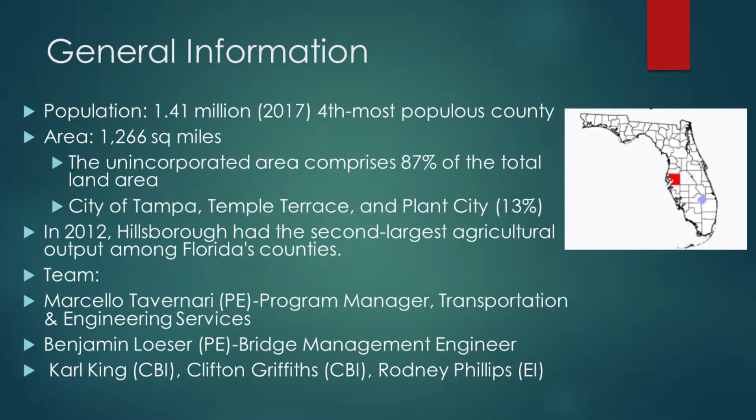All right, so just wanted to kind of share what we're doing in Hillsborough County, how it's all eerily similar to the states and everything that the states are doing. So just a little bit of information. Hillsborough County area has 1.4 million people, a little over 1,200 square miles. The unincorporated area, which is Hillsborough County, is about 87% of that. So a lot of rural areas. The city of Tampa is the primary city, makes up more than half that population. Just interesting fact, a lot of agricultural. We see that in our rural areas, that's actually a lot of the impacts on our bridges.

So some of our team: Marcello, he's our program manager. He oversees all of our asset management for pavement, bridges, sidewalks, intersections. And then there's myself, I'm the bridge management engineer. And then I have two CBIs working for me, as well as an EI. So that's very uncommon to even have inspectors or have engineers working for you. The county's staff and management knows that this is very important.

Just a little bit about our inventory. We've got 249 bridges. That's the most out of any local agency in the state of Florida. We've got about 25 non-qualifiers with our pedestrians, trails, et cetera. I don't know about you guys, but right now in Hillsborough County, growth. We have a large number of neighborhoods, developments going on in the southern part of our county. A lot of development projects. We're working with developers and engineers who've never done bridges, who are designing bridges that are going to become part of our inventory. So working with them has been very much of a challenge.

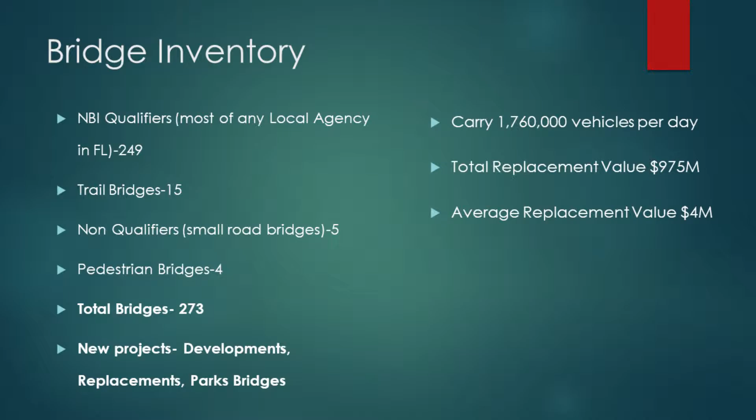And just a little bit of our almost $1 billion worth of value of our bridges. Some of our bridges, a lot of channel beams that were built out in the 60s, box culverts, our AASHTOs. We have one bascule, a lot of flat slab, and one swing type. So you can see the bridge material types, concrete, pretty much 95%. A little bit of metal and a few timbers here and there. Beams, a little half of our inventory is beams, slabs and culverts are about a quarter each.

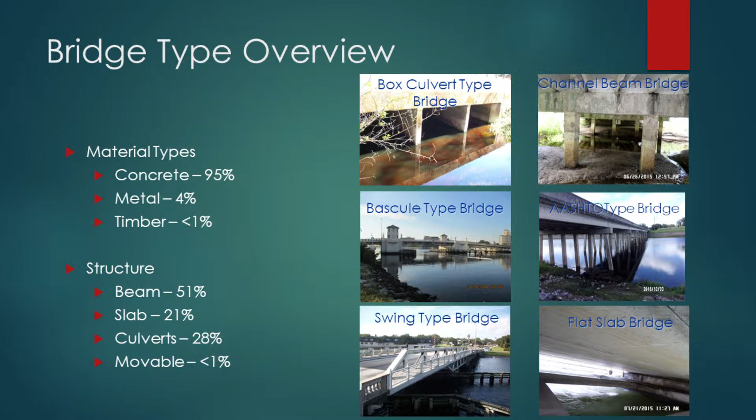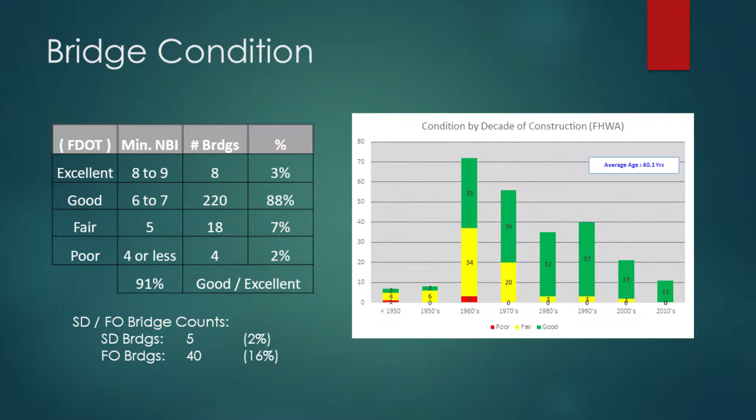So some about our bridge condition, we're actually doing pretty well, considering about 91% of that is 6s and 7s and up. So this actually mirrors kind of the Florida DOT, the bridges that I was managing at the time for District 1 and 7. These numbers look eerily similar, with a few structurally deficient here and there. And so overall, we're actually in pretty good shape. And as you can see, based on the condition, I feel like this looks almost identical to everybody's inventory with the 60s and 70s. So obviously, a little over a third of our inventory is already past their design life, with an average age of 40 years for us.

So funding's always the biggest thing, right? So a few years ago, our Board of County Commissioners approved $800 million over a 10-year period for public works, public utilities. And so we got about $4.4 million of that towards the bridge and guardrail program. 9 or 10 projects, you see there about $12 million, we were able to get funded for replacement. So those structurally deficient bridges, some of those issues, we are getting replaced.

And then just this past November, the tax referendum, the Hillsborough County voters approved a penny sales tax for transportation, as well as a half-penny sales tax that went towards the school district. So very, very important, very big. They're estimating upwards of $275 million per year in transportation funding. Hillsborough County is going to get maybe $150 million of that. It's still unknown at this point how much is going to go to the bridges. They want to know, how much money do you need? Well, I don't know.

So what do we need, right? A bridge management system. Even with 250 bridges, I'm still being asked the same questions. You know, Mike mentioned this morning, what's your 10-year plan? I was asked last week, what's your top 50 bridges you want to replace? I don't know. So let me put some numbers together, run some reports.

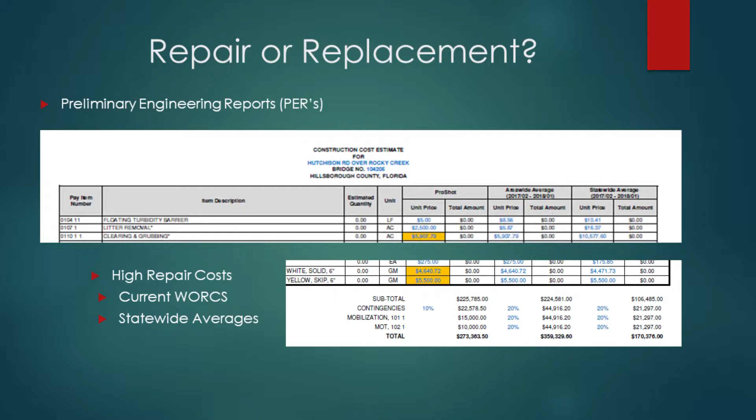We're doing that by hand, right? We're looking at it, we're reviewing it, we're making decisions in a room, and from there we're determining what do we want to do with this bridge. Minor repairs, major repairs, replacement, right? Kind of that first step is putting together with my countywide construction just minor repairs, joint repairs, small repairs, things that are just real easy that I know they can do. I put a list together and create that work plan for them for the upcoming fiscal year.

From there, all the more major reviews, major repairs that need some engineering evaluation, we put those together. And that's where those PERs come in. We're going to send the consultants out, do an inspection, come back, create a report for us, something that's binding. We have them bind it. We can give this to management if they ask, hey, why are you replacing this bridge? Here's a full report, the major repairs, the minor repairs, here's the replacement cost.

So we find that very valuable. At first I was kind of hesitant because I'm like, it's just a minor repair. But then you think about it, when management wants to know things, they want to know things, right? So if we can produce something very quickly, then it really benefits us. So from there, they're going to provide those reports back to us, and then we're going to make some decisions.

Are we going to give it to this WORCS contract, we call it a WORCS contract, work order, to the contractor, or are we going to put this out to bid? The costs are just way too high. Then we look at our replacements. Do we just want to replace it? And so we kind of try to develop those different categories of our bridges and then try to create that work plan based off of that. And then ultimately it comes back around post-construction, post-inspection, follow up the next year when the inspections come back in, make sure all the repairs were made, et cetera.

Repair or replacement. Here's an example of one of our PERs. ProShot is the name of the contractor. And so these are all their unit prices that are already pre-established, obviously. So when we look at the needs for that bridge and those unit prices, upwards of $275,000 if I were to give them this project. All right, well, if I put this out to bid, it's $200,000. I mean, are you going to put a $200,000 project out to bid? Most likely not. That's just not a lot of money there.

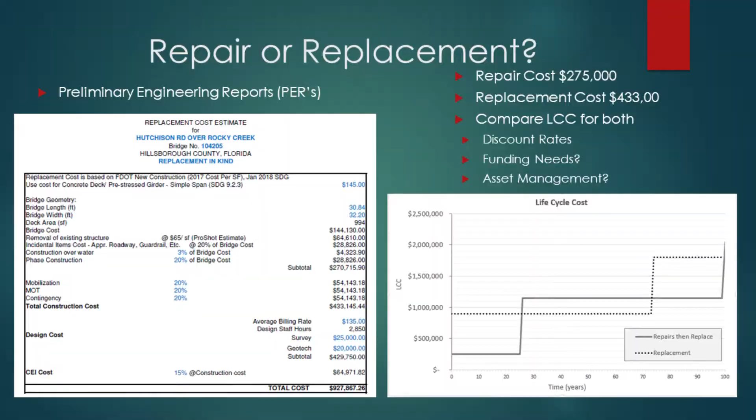Trying to figure out repair cost, replacement cost, doing life cycle analysis, try to put some numbers together here. Do I spend $275,000 now and then replace it 25, 30 years from now? Okay, well, I'm going to need $1 million then, but what if I have $1 million right now that I can spend? So I think that's where a lot of us are in the funding and the needs, where a lot of our bridges are so small and these repair costs just get so high that we're just kind of making that decision.

In this particular case of this bridge, actually the ratings are fine, but the metal sheet pile walls that hold back the roadway are failing and are severely corroding, and I've got about 3 feet of clearance to do the repairs, and it's in the water. I don't know how I'm going to do that other than driving new sheet pile walls, and it becomes very difficult, and a contractor cost to do that is just significantly high. So with the funding that we have coming in, we're making those decisions to just go ahead and replace some of these structures.

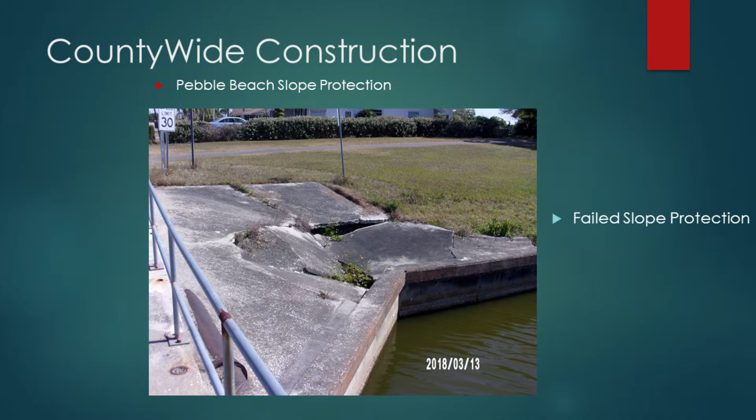I just wanted to give some examples of some of the work that we're doing. Our countywide construction crews have some slope pavement failures here at a bridge.

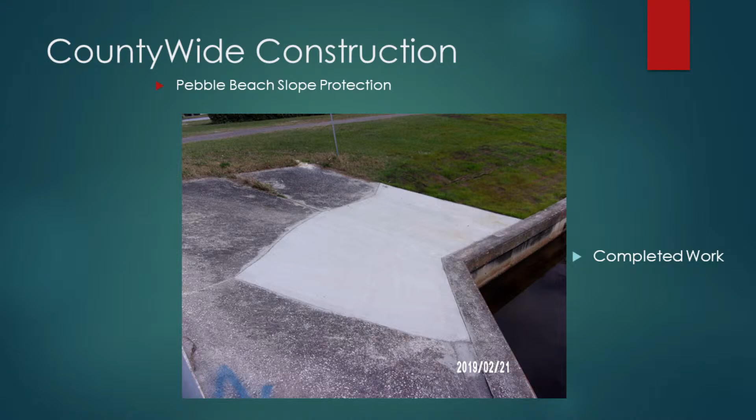The guys were able to come in, throw down the mats, redo the soil, re-pour the concrete, make it all nice and pretty. This is actually one of the bridges we're planning on replacing. It's actually one of our non-qualifiers, but it's in such bad condition. Again, the cost to repair was like $250,000, and to replace it, it's like $450,000. So that's the game plan there.

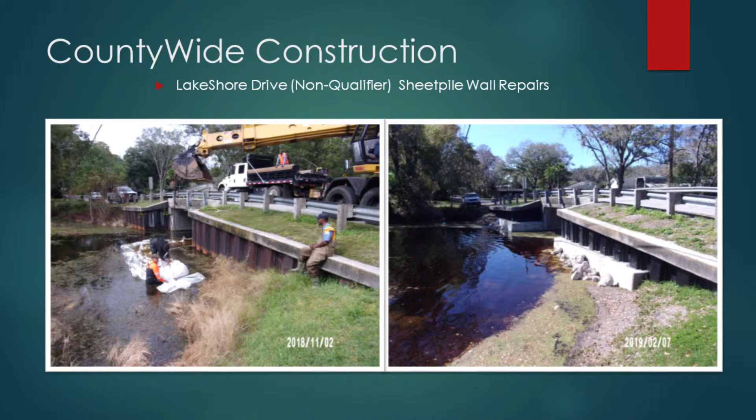Some more examples, some sheet pile work. The guys were able to go in and de-water, put up these bags, de-water out, clean and paint the sheet pile walls. And one of the things that we're doing is installing these stub walls at the lower portion of these sheet piles, and provide some rock rubble just for any future kind of scour. I mean, it's a lake, so there's not really going to be much scour, but this is one of our non-qualifiers as well. We shouldn't have to go back and really touch that for another 20 years, for that substructure.

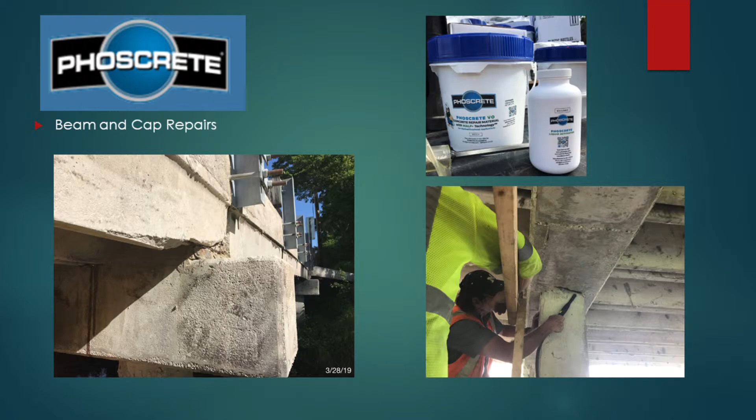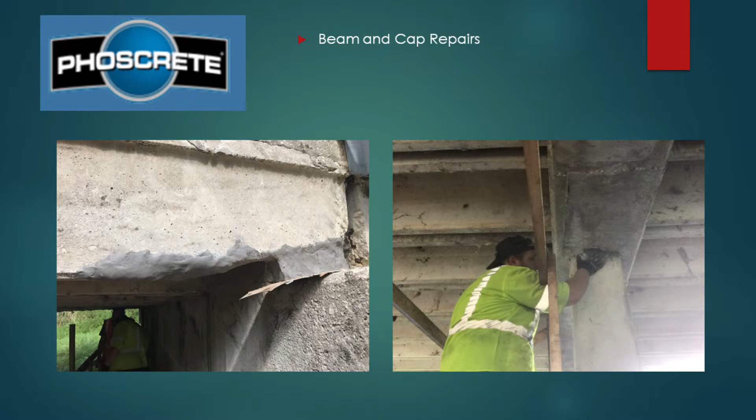One of the other things we did last week with Phoscrete, they've been here with us. We did some concrete beam repairs with them. So we did some beam repairs, some cap repairs, trying out the product, seeing if it works, seeing if we like it. It's different from what the crews are used to doing, so it's a learning process. So we had the guys come out, install, as you can see, some of the concrete. So we're going to try it out, see how it works for us. That was one of the benefits. I think I was at the conference last year, saw these guys, talked to them, was interested in them. We're trying them out. Let's see how it works.

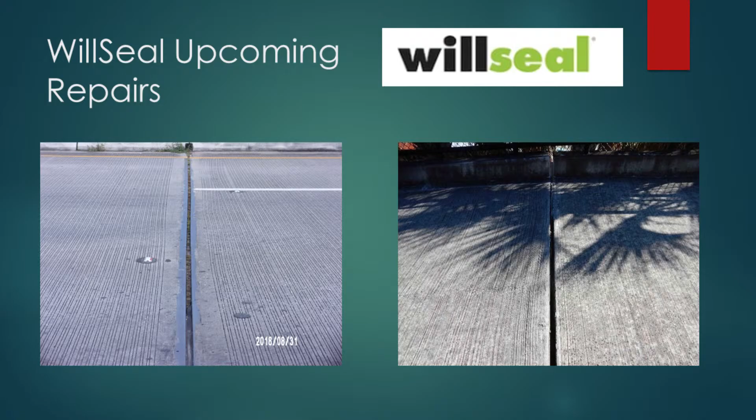Something else we're doing, some upcoming joint repair. We met with a supplier called WillSeal. They do joints. They came down, met with us. We're going to be doing some demos with them probably in the next few weeks, trying out some compression joints they have. This is actually one of our pedestrian trail bridges. Goes over 8 lanes of traffic. The joints are completely gone, never been replaced. No one's ever touched them. Our park service used to manage these. They don't know anything about bridges. And so 2-3 years ago, our director of public works transferred all the bridges from the trails group over to public works. So now, thankfully, most of them are in good condition, but some do need some repairs.

But this is a pretty beautiful bridge, brand new. It's a steel box girder. If you were to look at these joints, there's black everywhere because the water comes down, and it's supposed to be a beautiful trail. A lot of runners, I use it. We need to do a work order on it. We need to clean it, install some joints, get it back to its original condition.

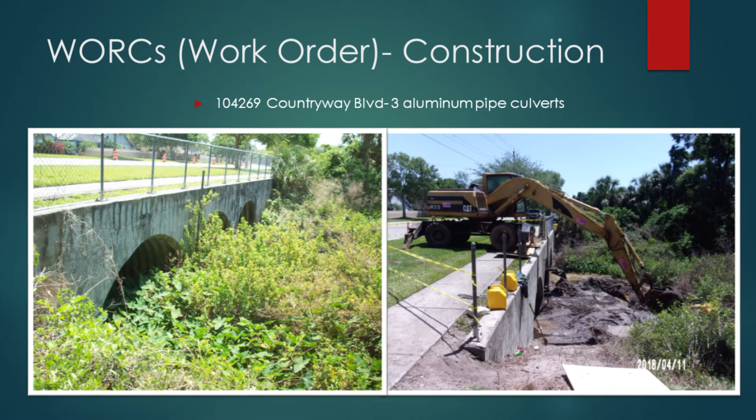Fun desilting. A lot of this, right? Vegetation build up in front of your culvert. It's never been addressed. Finally, let's go address it. Go in, clean it out. Oh boy, what's going to happen? Completely deteriorated culvert. We don't know why that's happened because it's not in an aggressive environment. It's in a neighborhood. It was not good.

So we had the contractor. A lot of what they do is this kind of shotcrete application. So we had them go in, and there were 3 of these pipe culverts, and had them restore it. Looks beautiful now, but it also cost me $250,000 to do the repair. As opposed to spending $1.5 million to replace all of these, we needed to act quickly. We made the decision. We had them do it.

Emseal is another product we had them use. Actually, this was the work order. We did some of these, I think, a few weeks ago. Had them install some compression joints, trying that out. So we gave them 5 or 6 bridges just to try that out, see how it works. They were using pretty much the pourables. With the Florida heat, they just dry a lot and crack, and they get punctured, and then they need to get repaired. So we're trying out some of these newer technologies of these compression joints, seeing how they work. We're going to monitor them, and hopefully they last, and hopefully we won't have to go back and repair them for many, many years.

So just some of our challenges moving forward: the usage of our technical maintenance division. Our group is technically in technical services, which is kind of like design, essentially. But what we're doing a lot of is maintenance. We know we're doing maintenance. We're working with our construction crews and maintenance crews. Roadway maintenance is one of our big issues.